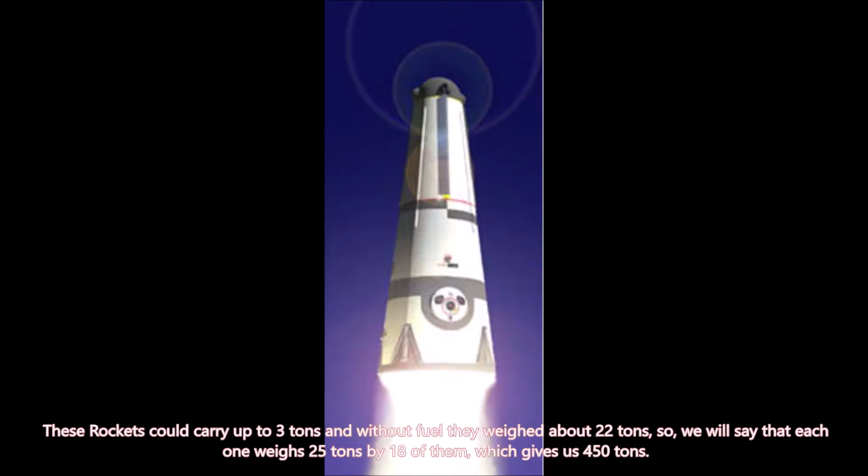To make the apex anchor required for this proposal, I will try to use a minimum number of conventional rockets. In this proposal I will use 18 Roton C9 modified rockets. These rockets could carry up to 3 tons, and without fuel they weighed about 22 tons. So we will say that each one weighs 25 tons, times 18 of them, which gives us 450 tons.

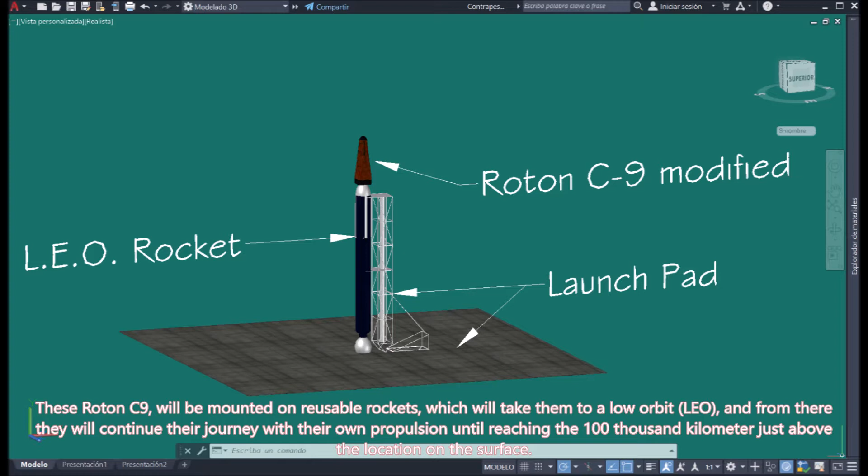These Roton C9 will be mounted on reusable rockets, which will take them to a low orbit, LEO. And from there they will continue their journey with their own propulsion until reaching the 100,000 kilometer location just above the surface.

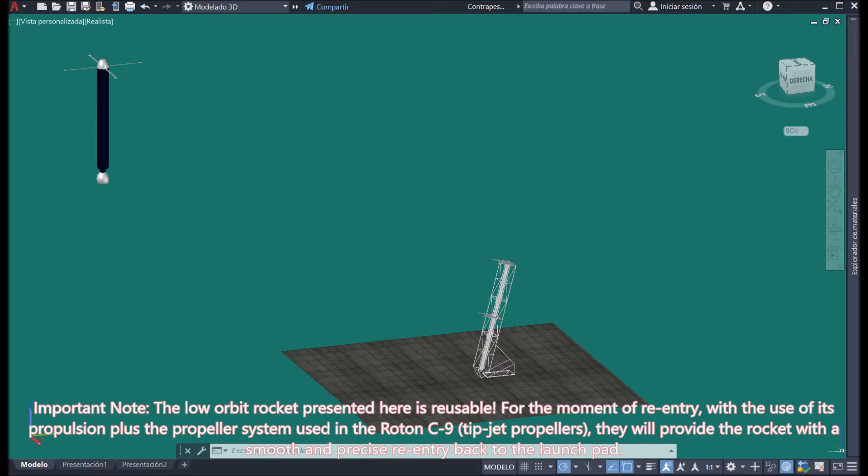Important note: the low-orbit rocket presented here is reusable. For the moment of re-entry, with the use of its propulsion plus the propeller system used in the Roton C9, tip jet propellers, they will provide the rocket with a smooth and precise re-entry back to the launch pad.

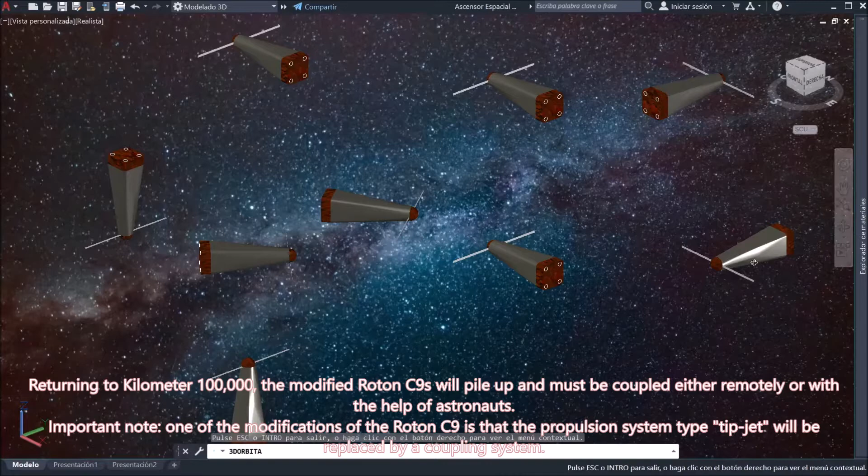Returning to kilometer 100,000, the modified Roten C9s will pile up and must be coupled either remotely or with the help of astronauts. Important note: one of the modifications of the Roton C9 is that the propulsion system type, tip jet, will be replaced by a coupling system.

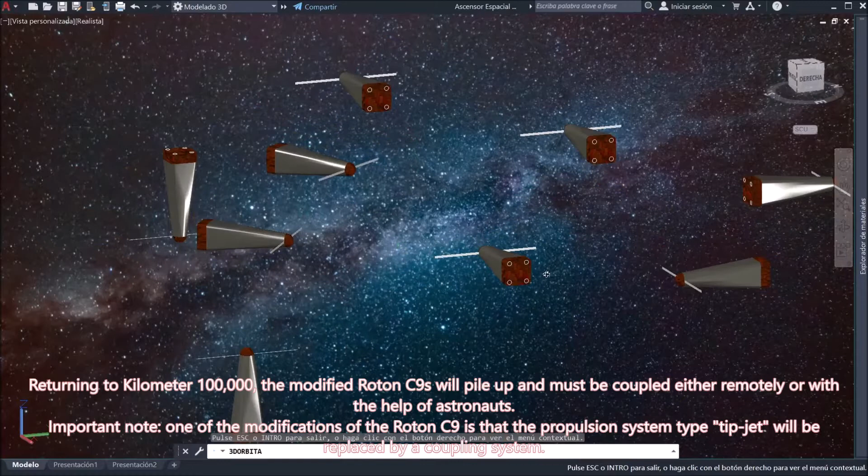First they will line up next to each other and then rotate 180 degrees, and using the docking system, they will come together until they dock three by three.

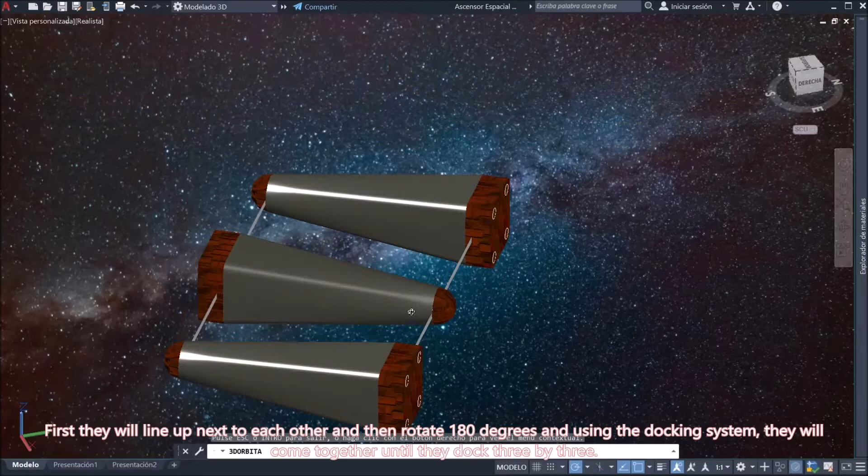When all the Roten C9s are assembled in threes, with the help of astronauts and parts sent from the surface, a circular metal framework will be assembled and the Roten C9s will be placed in a triangle as shown below.

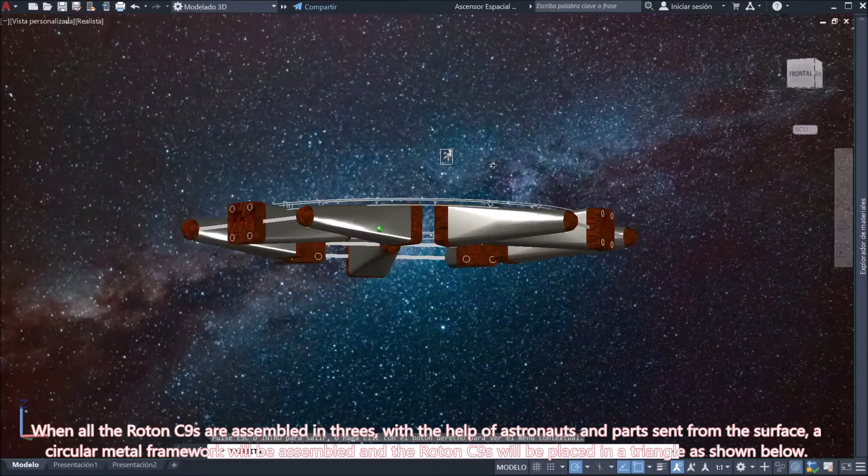And when the 18 Roten C9s are attached to the circular metal framework, everything should look as shown below. Important note: the astronauts are to real scale to give an idea of the dimensions of the project.

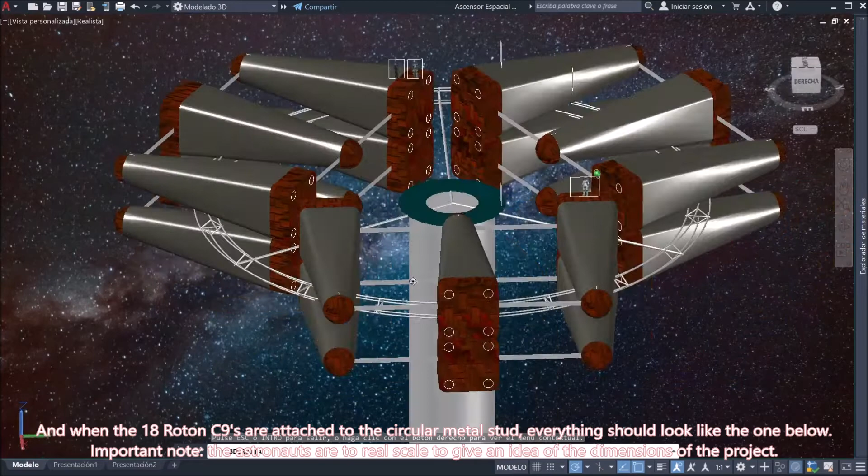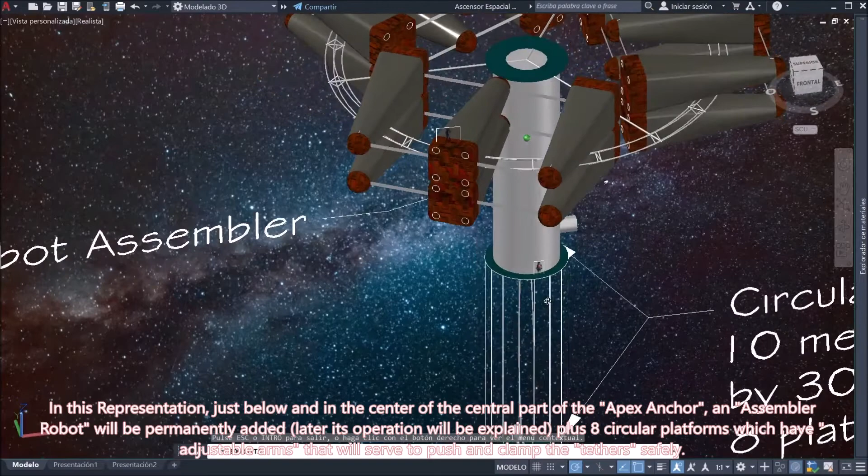In this representation, just below and in the center of the central part of the apex anchor, an assembler robot will be permanently added. Later its operation will be explained, plus 8 circular platforms which have adjustable arms that will serve to push and clamp the tethers safely.

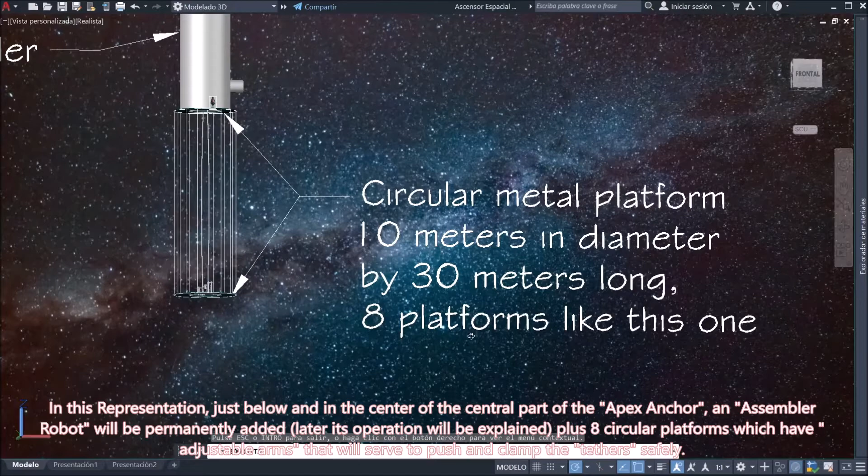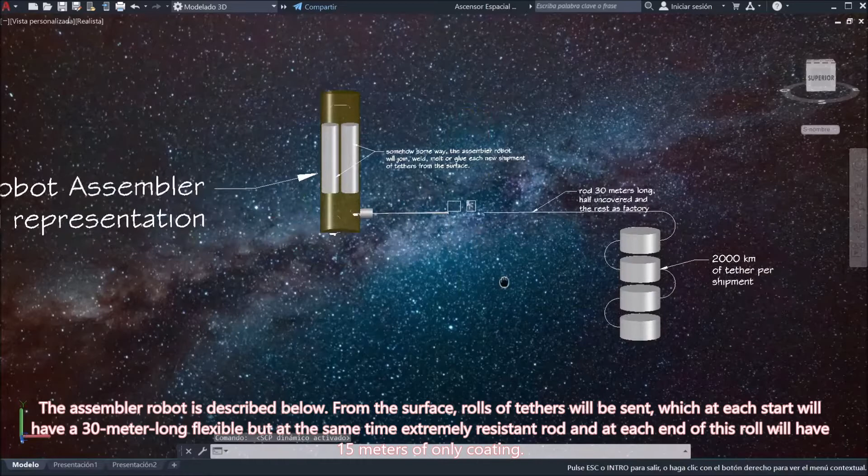The assembler robot is described below. From the surface, rolls of tethers will be sent, which at each start will have a 30-meter-long flexible but at the same time extremely resistant rod, and at each end of this roll will have 15 meters of only coating.

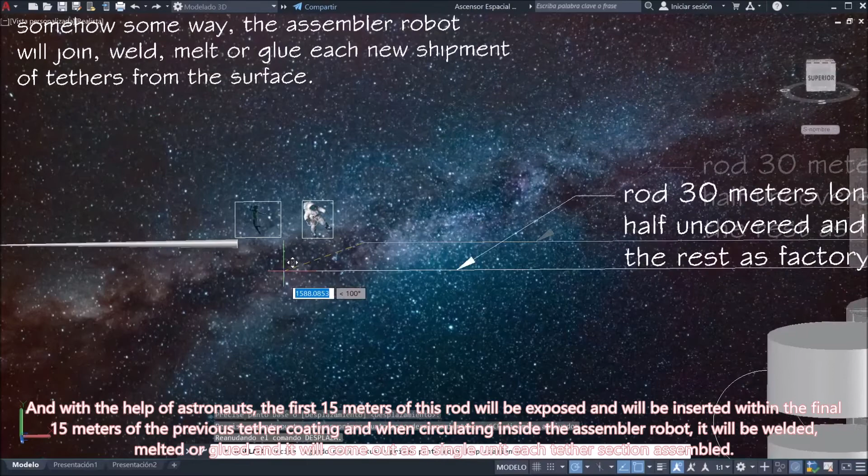And with the help of astronauts, the first 15 meters of this rod will be exposed and will be inserted within the final 15 meters of the previous tether coating, and when circulating inside the assembler robot, it will be welded, melted or glued, and it will come out as a single unit each tether section assembled.

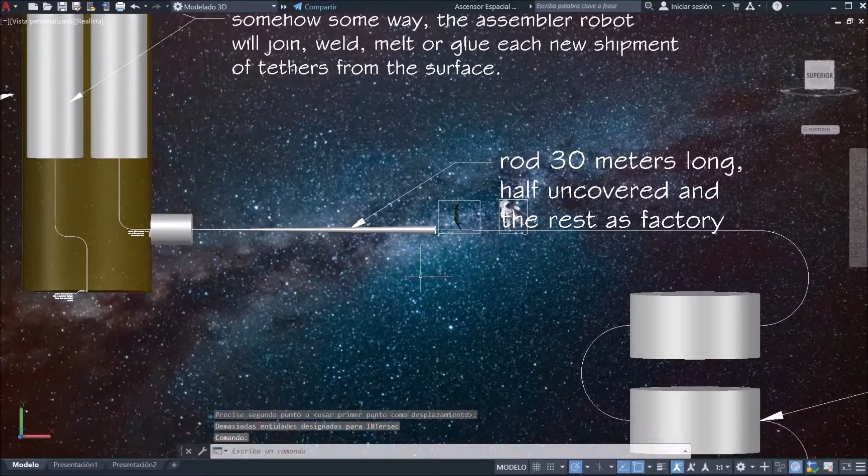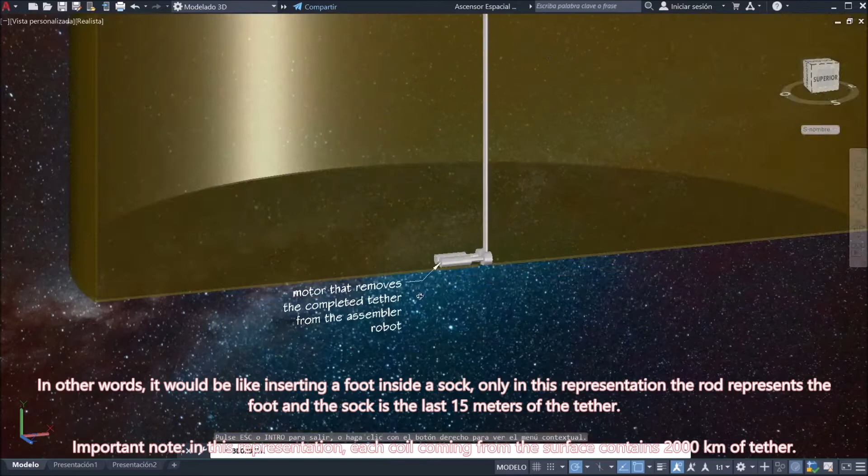In other words, it would be like inserting a foot inside a sock. Only in this representation, the rod represents the foot and the sock is the last 15 meters of the tether. Important note: in this representation, each coil coming from the surface contains 2,000 kilometers of tether.

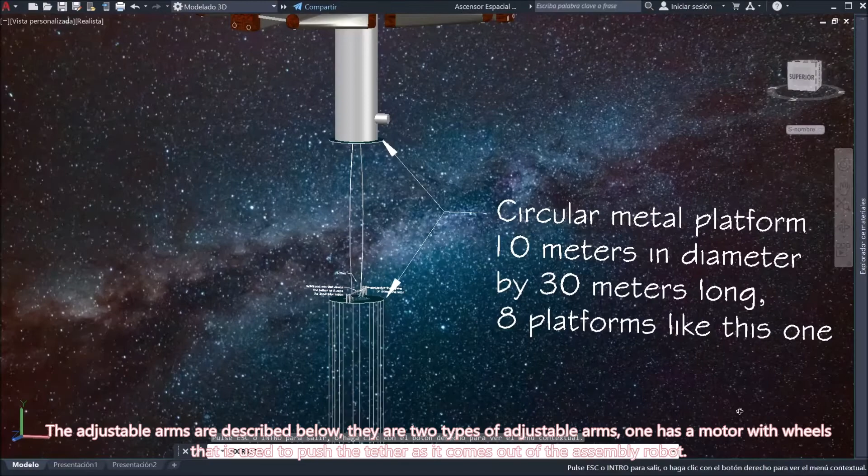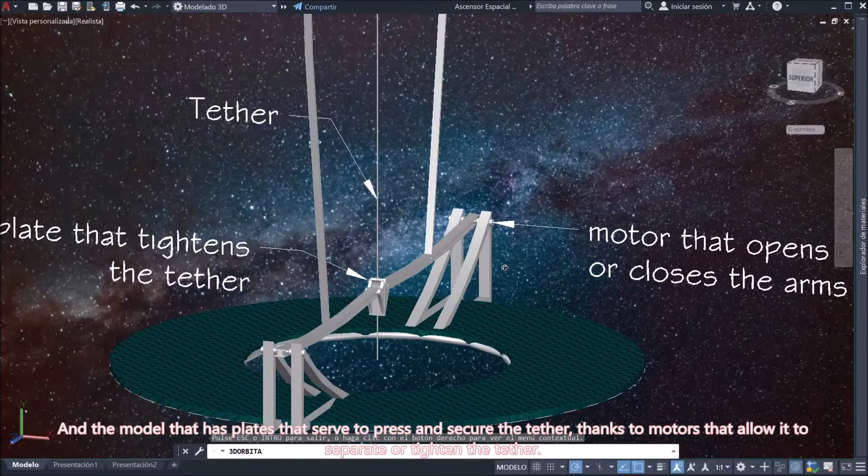Adjustable arms are described below. There are two types. One has a motor with wheels used to push the tether as it comes out of the assembler robot. The other model has plates that press and secure the tether, thanks to motors that allow it to separate or tighten the tether.

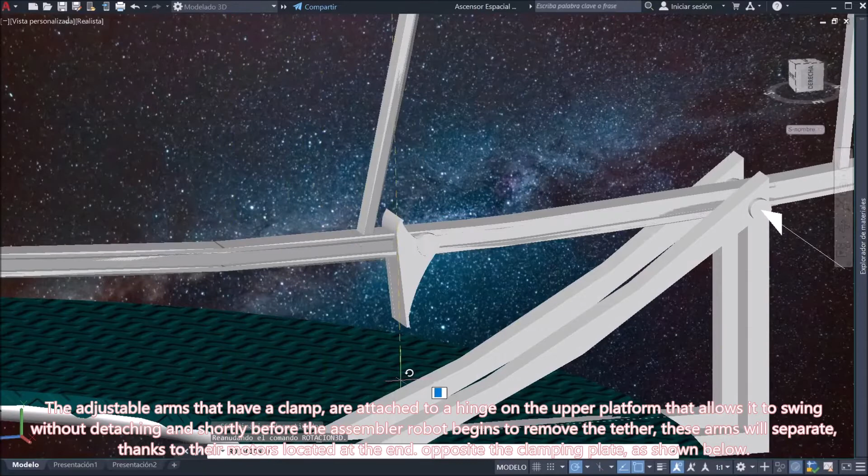The adjustable arms that have a clamp are attached to a hinge on the upper platform that allows them to swing without coming off, shortly before the assembler robot begins to remove the tether. These arms separate thanks to their motors located at the end opposite the clamping plate, as shown below. When the tether needs to be re-secured, the arms close back up and press the tether down.

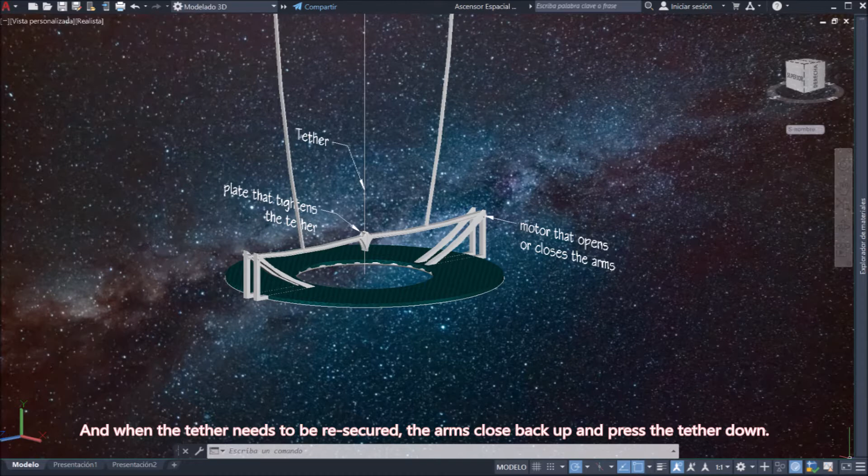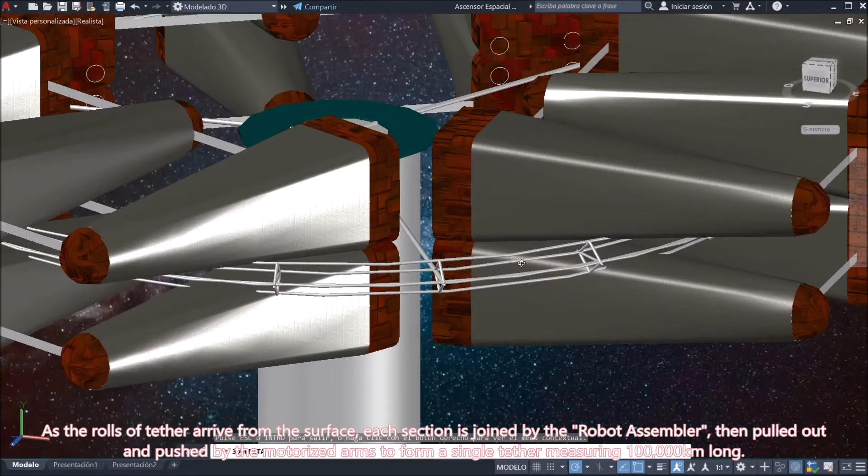As the rolls of tether arrive from the surface, each section is joined by the assembler robot, then pulled out and pushed by the motorized arms to form a single tether measuring 100,000 kilometers long.

In order to prevent the tether from accumulating under the platform where it begins, a robot with multidirectional propulsion will be attached to it, which will pull the tether as it comes out, always pointing towards the Earth, specifically towards Panama.

As this multidirectional robot runs out of fuel and/or the cable becomes too heavy to pull, it will need to be replaced with a new and/or more powerful one. This process will be repeated until completing the 100,000 kilometers of tether necessary to reach the Earth's surface.

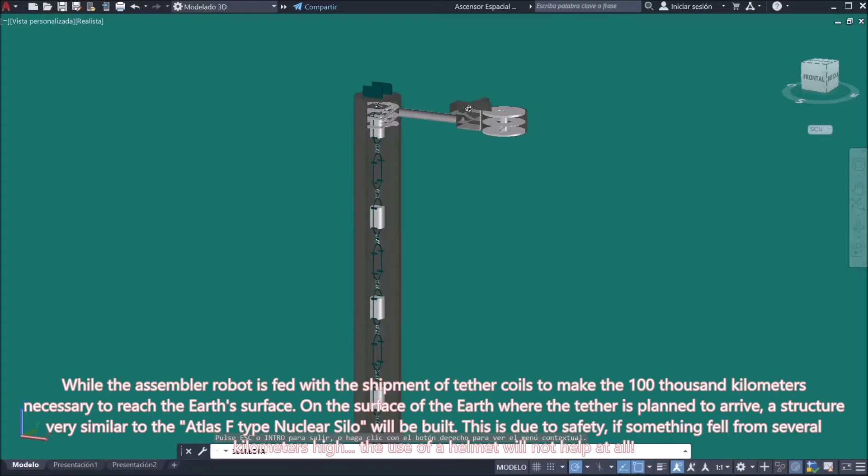While the assembler robot is fed with shipments of tether coils to make the 100,000 kilometers necessary to reach the Earth's surface, on the surface of the Earth where the tether is planned to arrive, a structure very similar to the Atlas F-type nuclear silo will be built.

This is due to safety. If something fell from several kilometers high, the use of a helmet will not help at all.

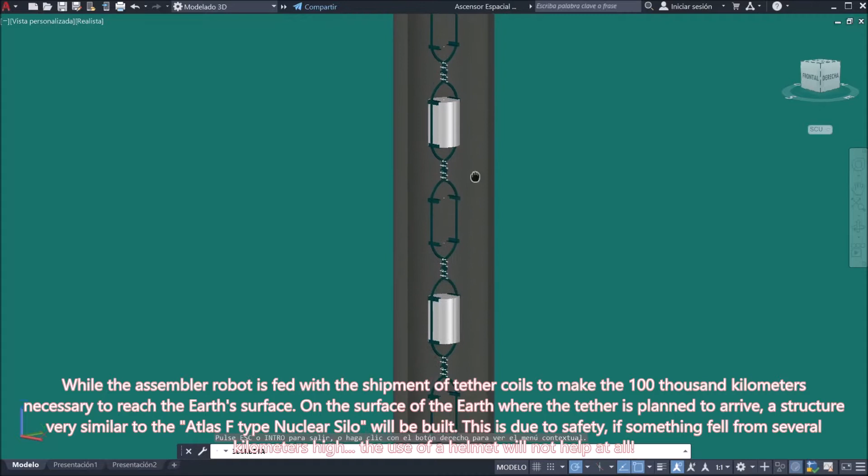This structure will also serve to maintain the climber, and as they leave the silo, the merchandise will be loaded or unloaded depending on whether it comes or goes to space.

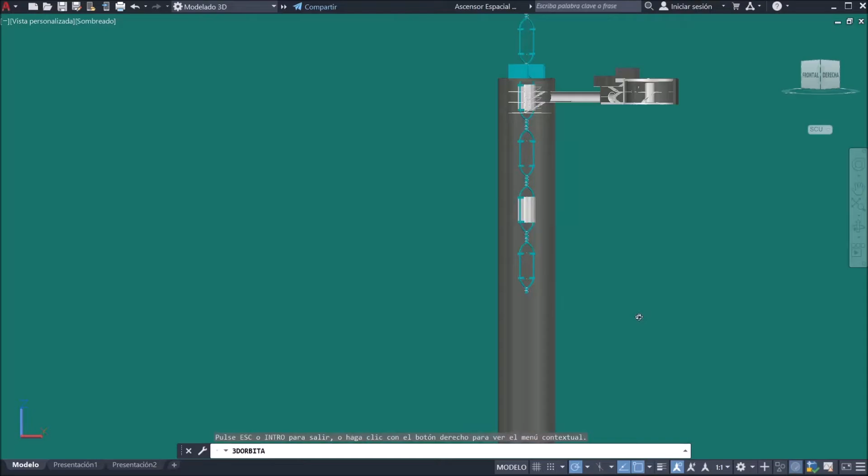Climber's explanation. I developed two types of climber. The first one is capable of carrying merchandise inside its special containers.

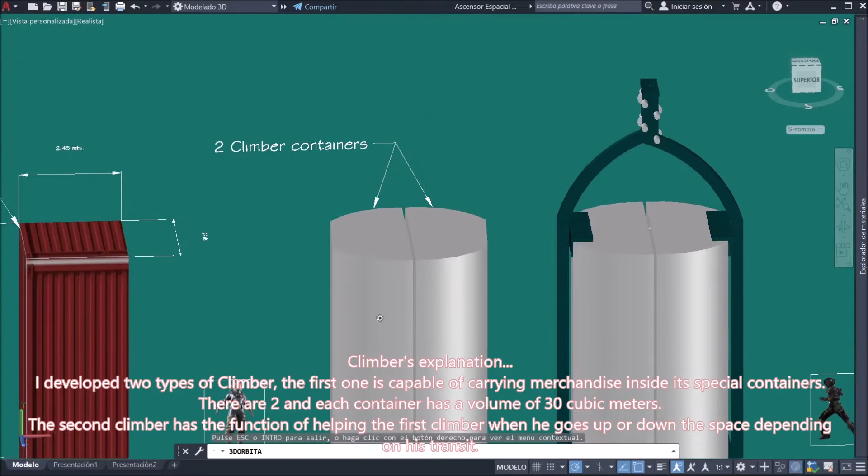There are two containers, each with a volume of 30 cubic meters. The second climber has the function of helping the first climber when it goes up or down to space, depending on its transit.

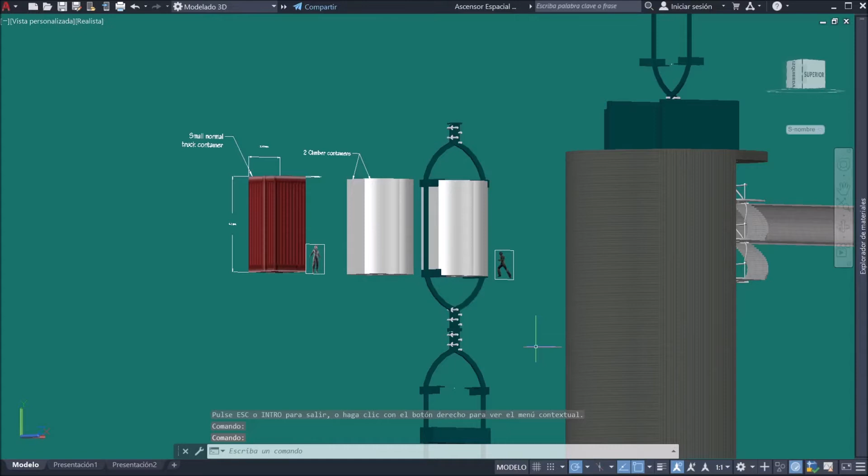And that's how it goes up and down the tether. Each climber has 8 motors that press the tether, instead of placing them tangent with the tether.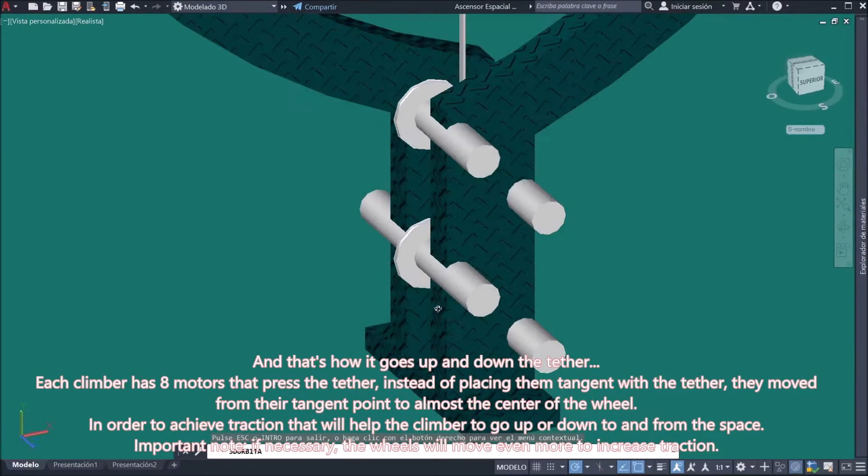They moved from their tangent point to almost the center of the wheel, in order to achieve traction that will help the climber go up or down to and from space. Important note: if necessary, the wheels will move even more to increase traction.

Meanwhile in space, after the silo or base on the surface is finished, in the last kilometers needed to connect heaven and earth - in this example we will say 1,700 kilometers -

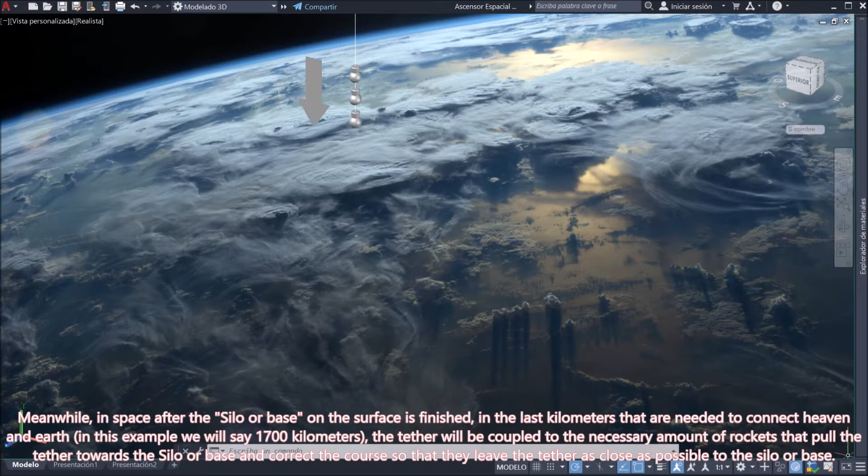the tether will be coupled to the necessary amount of rockets that pull the tether towards the silo or base and correct the course so that they leave the tether as close as possible to the silo or base.

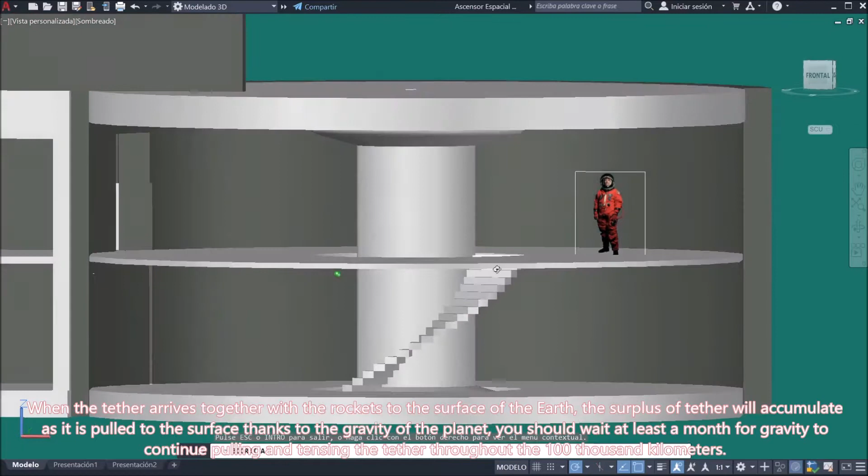When the tether arrives together with the rockets at the surface of the Earth, the surplus of tether will accumulate as it is pulled to the surface thanks to the gravity of the planet. You should wait at least a month for gravity to continue pulling and tensing the tether throughout the 100,000 kilometers.

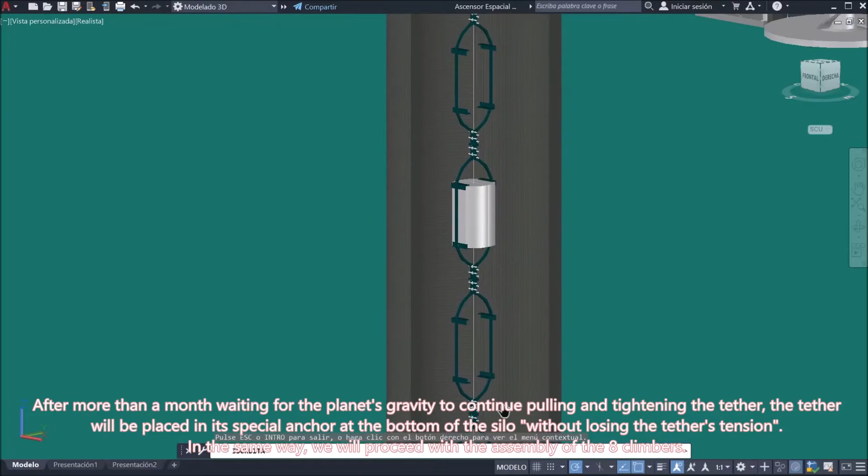After more than a month waiting for the planet's gravity to continue pulling and tightening the tether, the tether will be placed in its special anchor at the bottom of the silo, without losing the tether's tension.

In the same way, we will proceed with the assembly of the 8 climbers. Important note: remember that the astronauts are on a real scale to give an idea of the dimensions of the project.

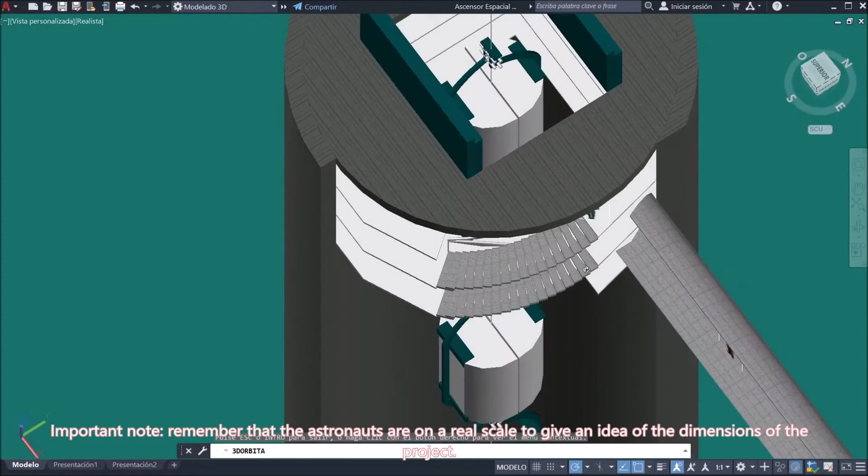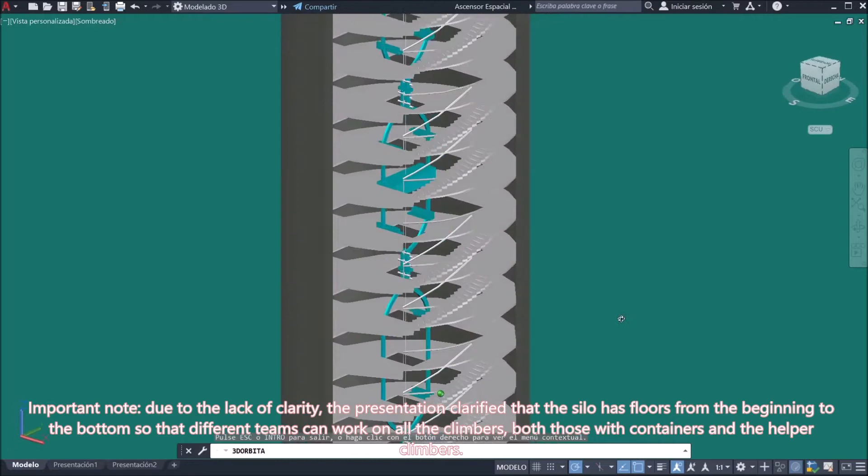Important note: due to the lack of clarity, the presentation clarified that the silo has floors from the beginning to the bottom so that different teams can work on all the climbers, both those with containers and the helper climbers.

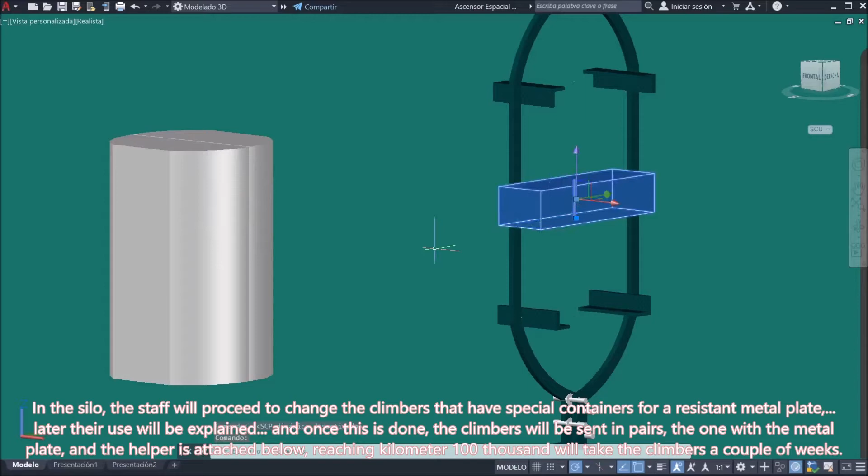In the silo, the staff will proceed to change the climbers that have special containers for a resistant metal plate. Their use will be explained later. Once this is done, the climbers will be sent in pairs: one with the metal plate, and a helper attached below. Reaching kilometer 100,000 will take the climbers a couple of weeks.

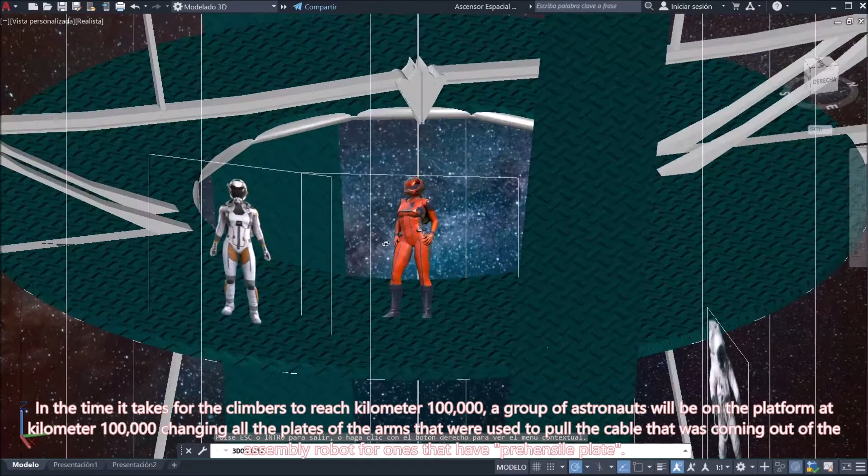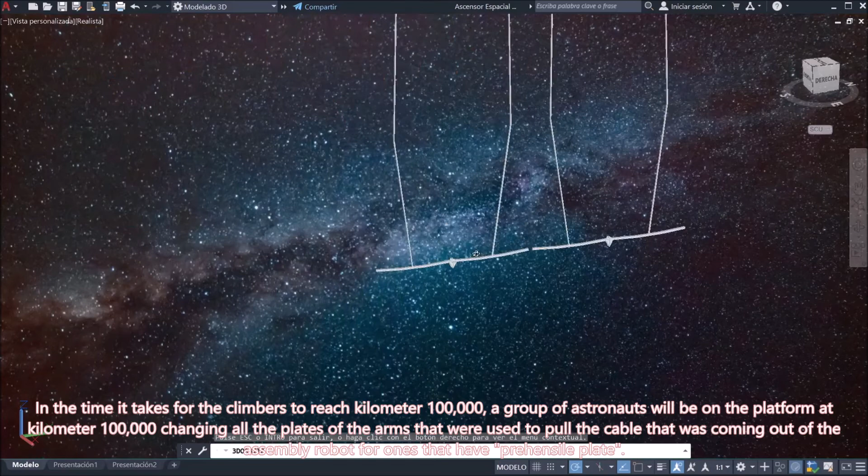In the time it takes for the climbers to reach kilometer 100,000, a group of astronauts will be on the platform at kilometer 100,000 changing all the plates of the arms that were used to pull the cable coming out of the assembly robot, replacing them with prehensile plate terminals. Once all the wheeled motorized arms are replaced and the climbers have reached the platform 100,000 kilometers away, it's time to relocate the platform.

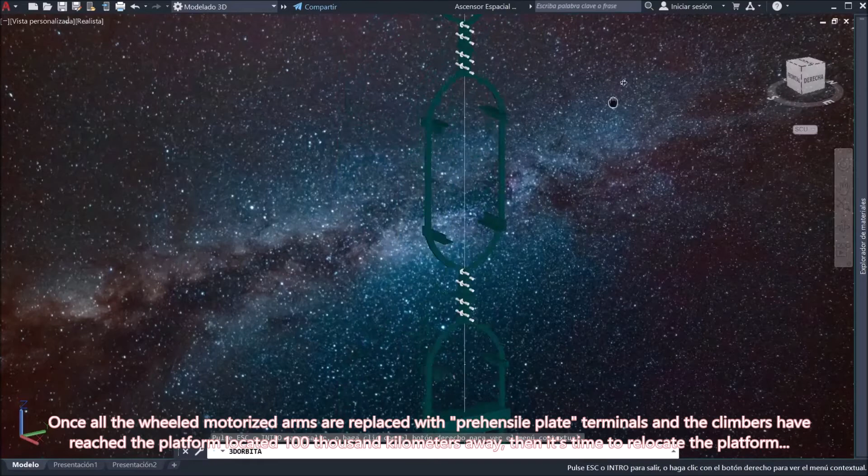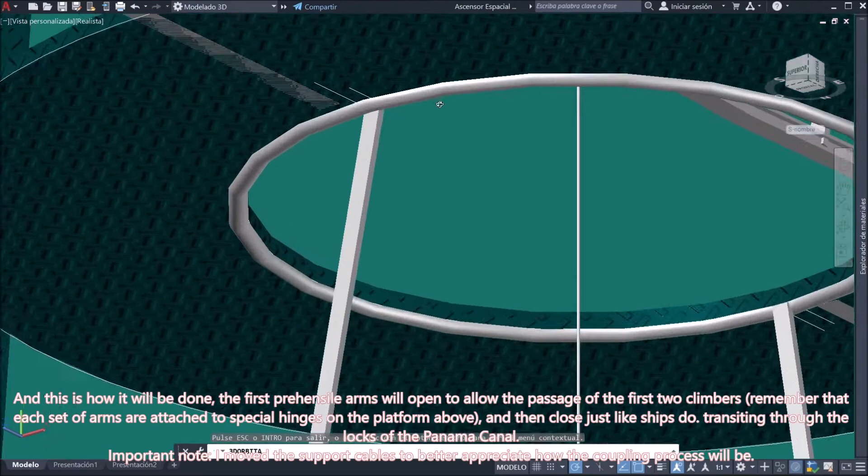This is how it will be done. The first prehensile arms will open to allow the passage of the first 2 climbers. Each set of arms is attached to special hinges on the platform above, then closes just like ships transiting through the locks of the Panama Canal. Important note: I moved the support cables to better appreciate how the coupling process will be.

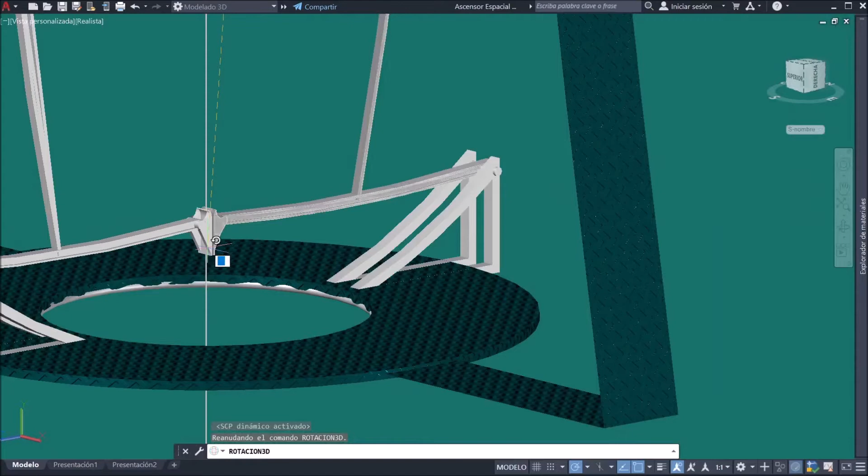Each lock will allow a couple of climbers to pass over and over again, but always maintaining 3 support points with respect to the tether. This process will be repeated until occupying the 4 locks that form a platform.

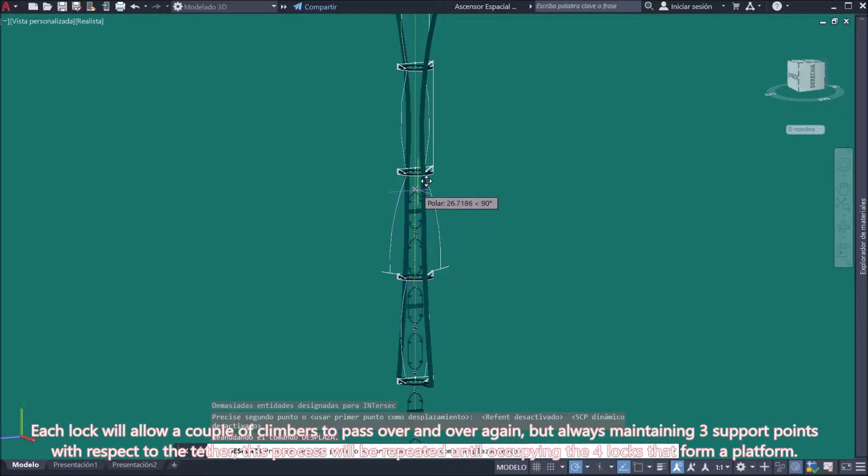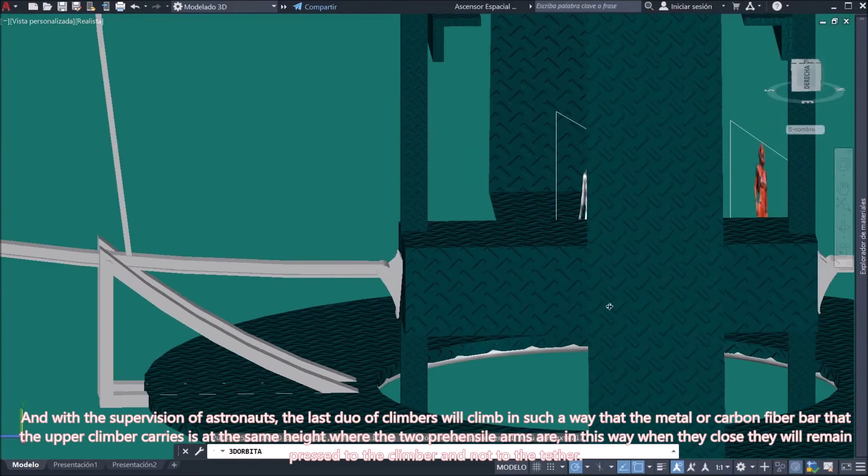With the supervision of astronauts, the last duo of climbers will climb in such a way that the metal or carbon fiber bar carried by the upper climber is at the same height as the 2 prehensile arms. This way, when they close, they will remain pressed to the climber and not to the tether.

This process will be repeated in the following 3 locks, so that each set of prehensile arms is holding the climber's bar.

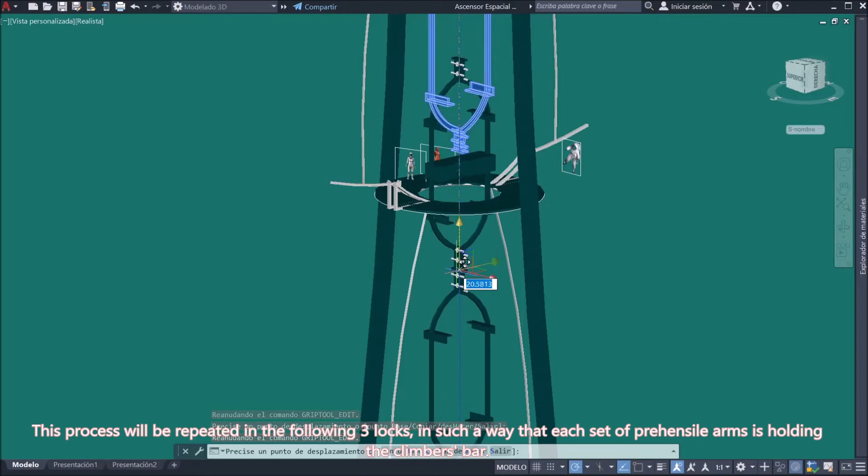When this process is finished, I will have a mobile platform and be able to transport it 64,000 kilometers further down.

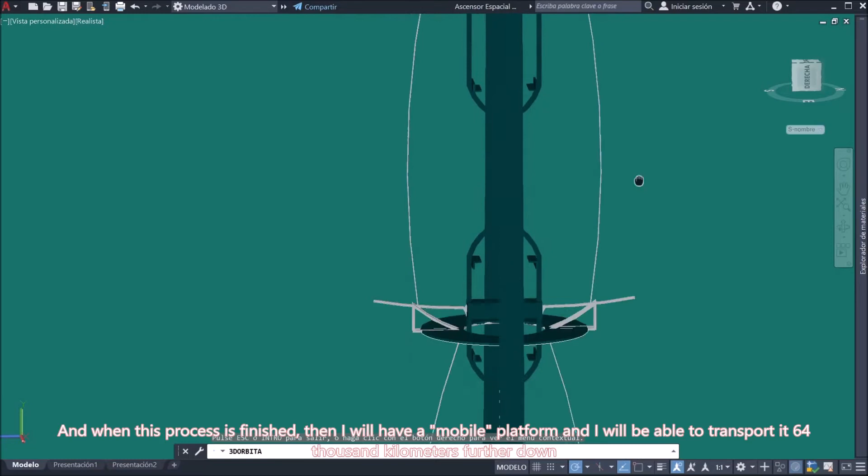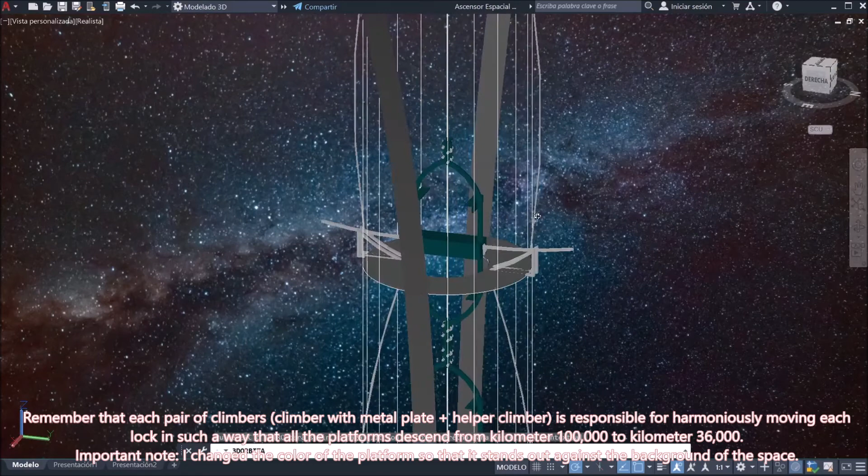Each pair of climbers, climber with metal plate plus helper climber, is responsible for harmoniously moving each lock so that the platform descends from kilometer 100,000 to kilometer 36,000. Important note: I changed the color of the platform so it stands out against the background of space.

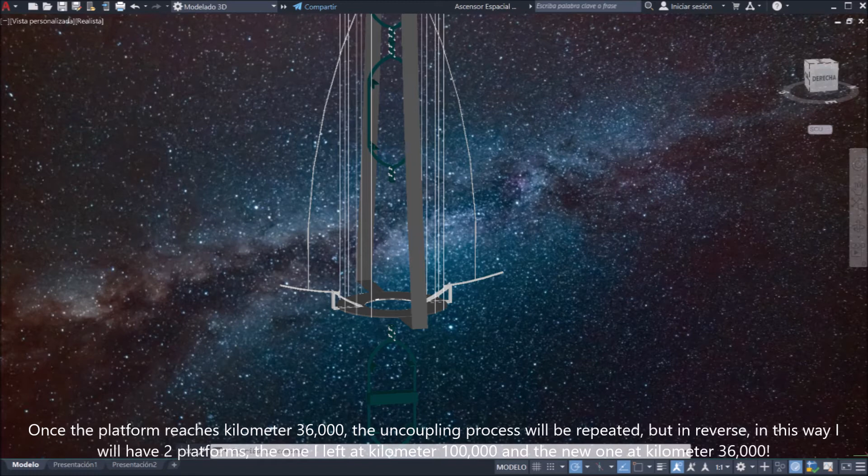Once the platform reaches kilometer 36,000, the uncoupling process will be repeated, but in reverse. This way I will have two platforms: the one I left at kilometer 100,000 and the new one at kilometer 36,000.

Using the same mobile platform technique, I could take the two platforms located at kilometer 100,000 and install them as close to Earth as gravity allows. In this representation, we'll say kilometer 800, and with these two platforms we could make an orbit hotel.

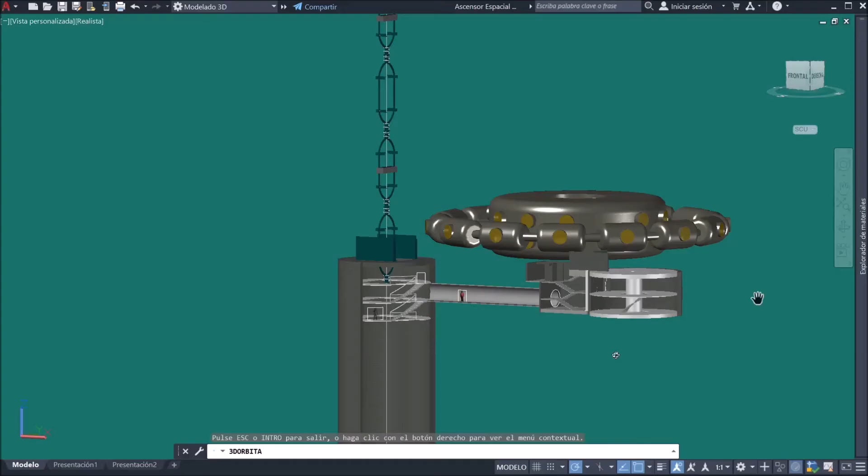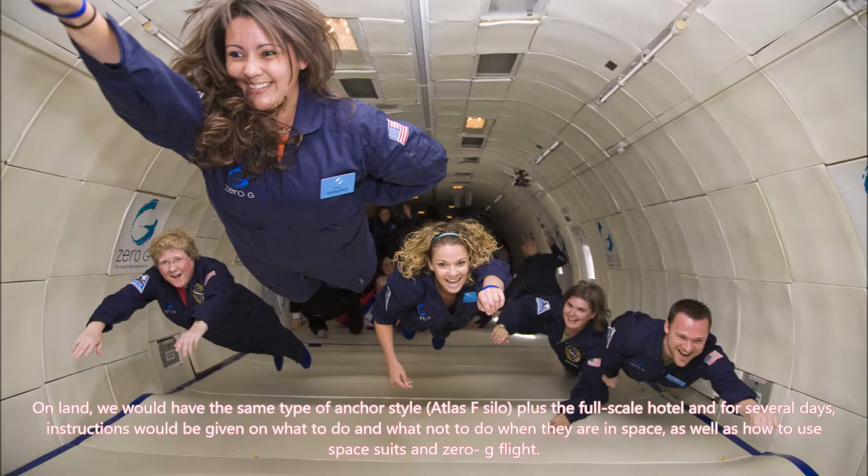On land, we would have the same type of anchor style, Atlas F silo, plus the full-scale hotel, and for several days instructions would be given on what to do and what not to do in space, as well as how to use spacesuits and zero-G flight.

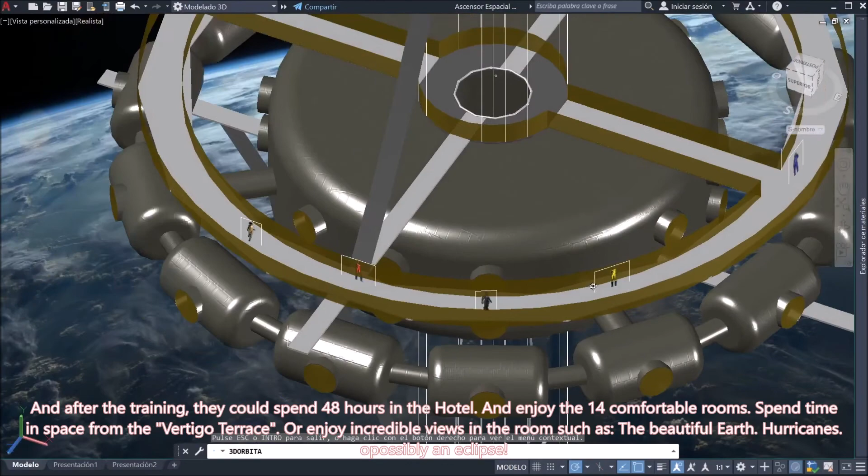After the training, they could spend 48 hours in the hotel and enjoy the 14 comfortable rooms, spend time in space from the Vertigo Terrace, or enjoy incredible views such as the beautiful Earth, hurricanes, possibly an eclipse.

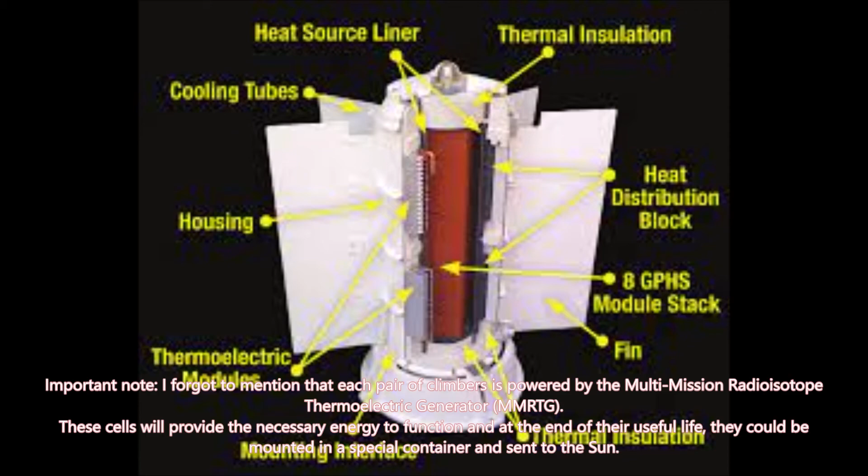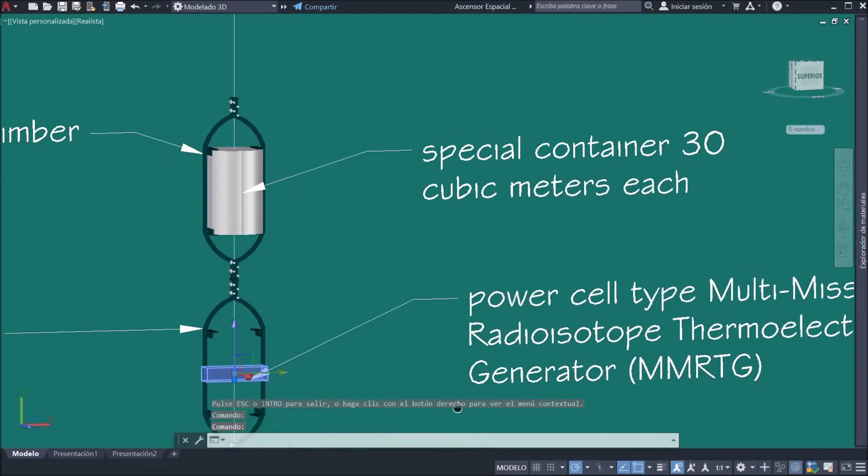Important note: I forgot to mention that each pair of climbers is powered by the Multi-Mission Radioisotope Thermoelectric Generator, MMRTG. These cells will provide the necessary energy to function, and at the end of their useful life they could be mounted in a special container and sent to the Sun.

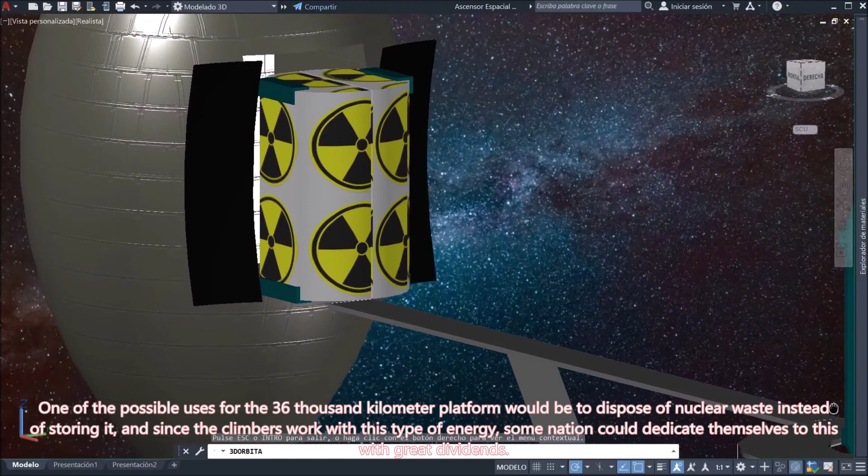Uses of the platform at kilometer 36,000: one possible use for the 36,000 kilometer platform would be to dispose of nuclear waste instead of storing it. Since the climbers work with this type of energy, some nation could dedicate itself to this with great dividends.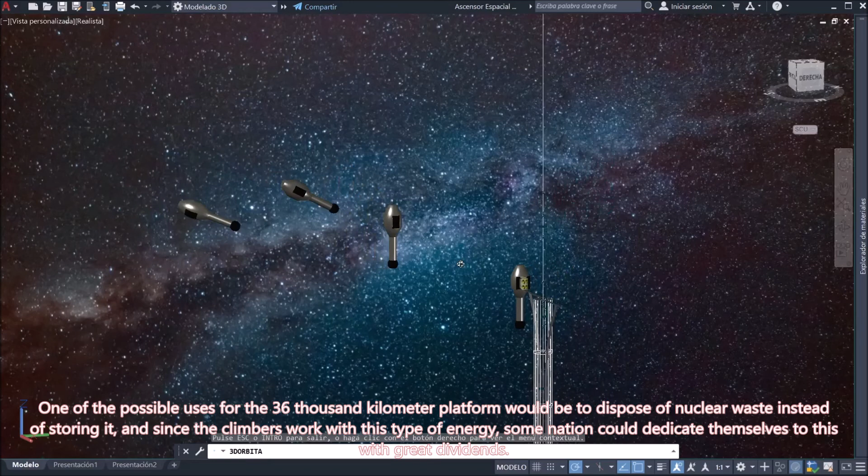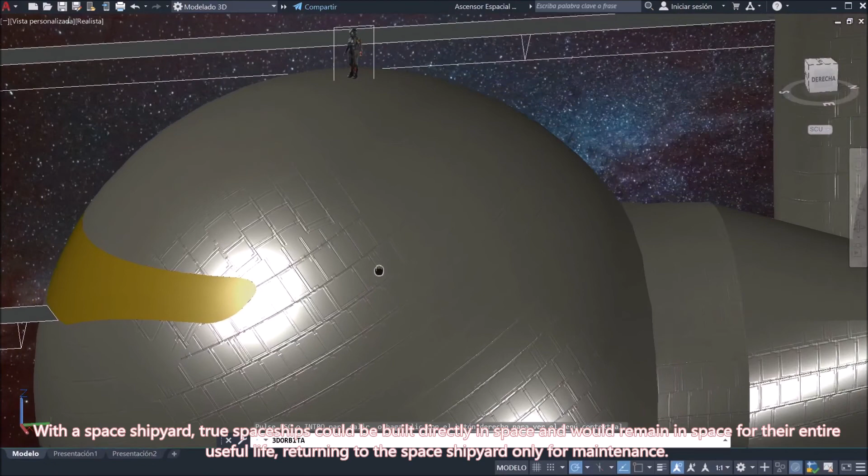With a space shipyard, true spaceships could be built directly in space and would remain there for their entire useful life, returning to the space shipyard only for maintenance.

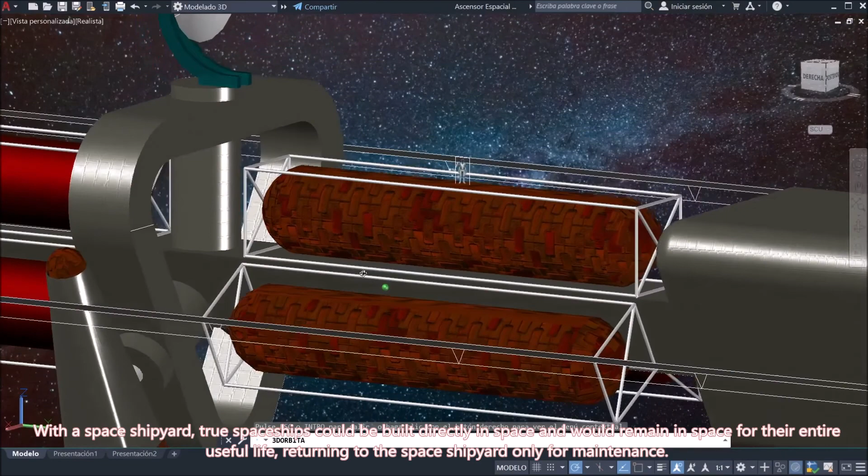In this way, manned missions could be sent to other distant planets more efficiently.